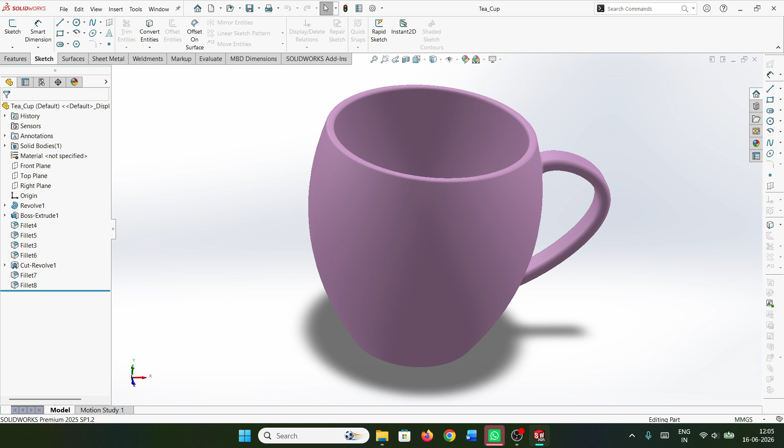So in today's video we are going to design this 3D teacup that you can see on my screen right now.

So let's get started. Click on File, New, click on Part and then OK.

Now that a new window has opened, click on Front Plane, Sketch, and select a center line. For the orientation, vertical and then infinite length. Place it at the origin.

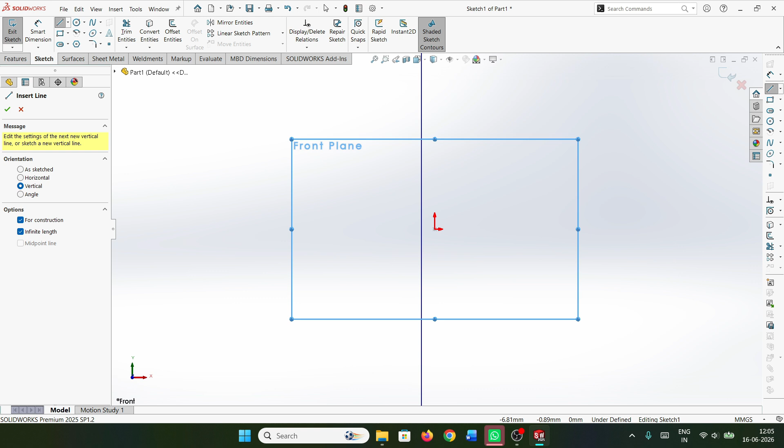Now select line, draw a horizontal line, then a vertical line and again a horizontal line. Go to smart dimension. The length of the vertical line is 60 mm. Bottom horizontal line, enter 20 mm, and the length of the top horizontal line is 30 mm.

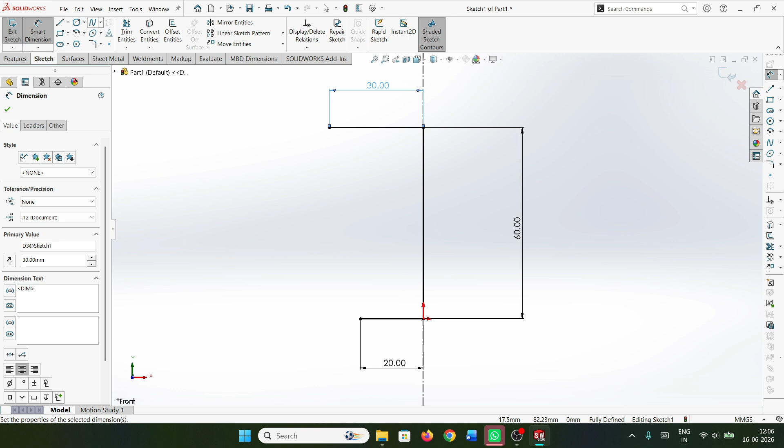Now select spline and make a 3-point spline here, point 1, point 2 and then point 3. Now go to smart dimension. As we have to define this spline also, select this point and the top line. So the distance between this point and the top horizontal line is 15 mm.

Vertical line and the point is 35 mm. Okay, this looks great.

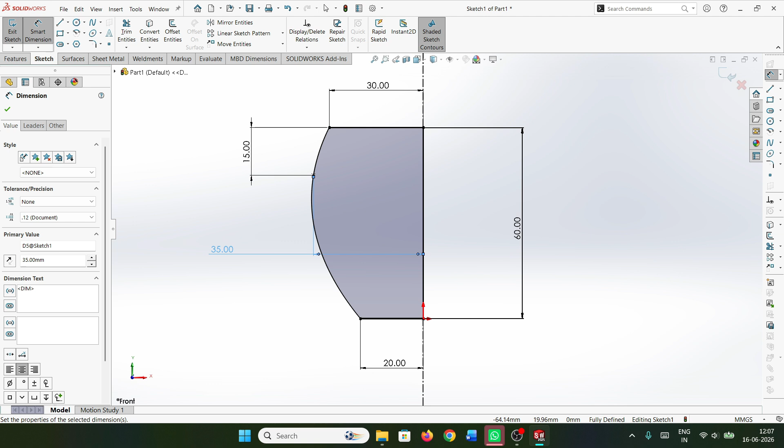Now exit sketch, go to features and select Revolved Boss/Base. So as you can see on the screen, our main body of the teacup is ready here.

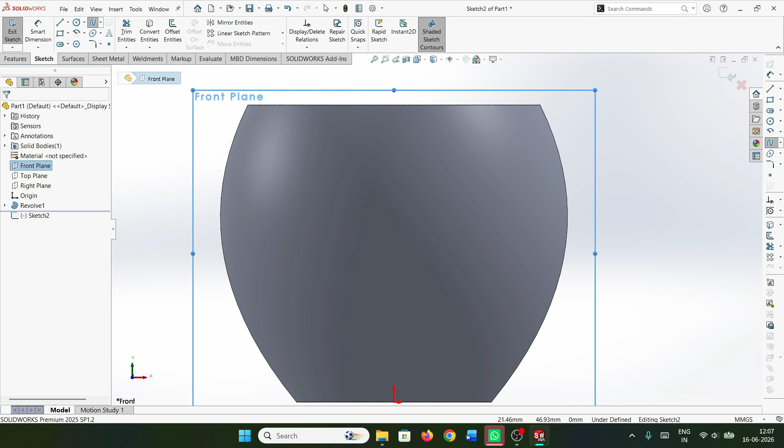Now select the plane, front plane, sketch and spline. Now we have to make the handle for the teacup. So point 1, point 2, point 3, point 4, point 5 and point 6.

Now go to smart dimension. Point 1 and the top edge, 15 mm. Point 2 and the top edge, 8 mm. Point 3 and the top edge, 20 mm.

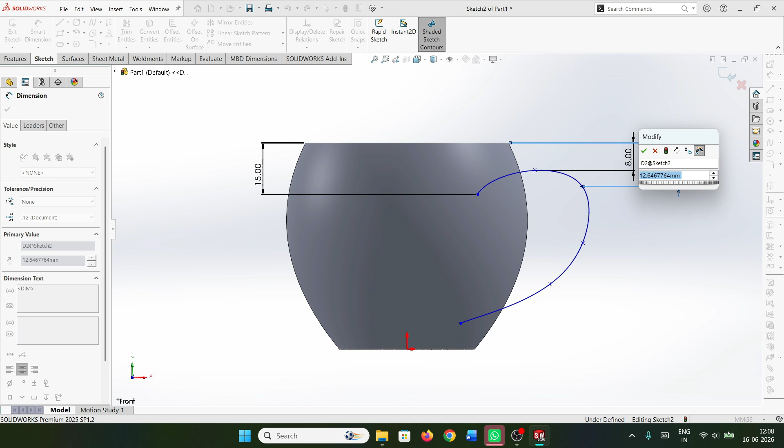Point 4 and the top edge, 30 mm. Point 5 and the top edge, 42 mm. Point 6 and the bottom surface is 10 mm.

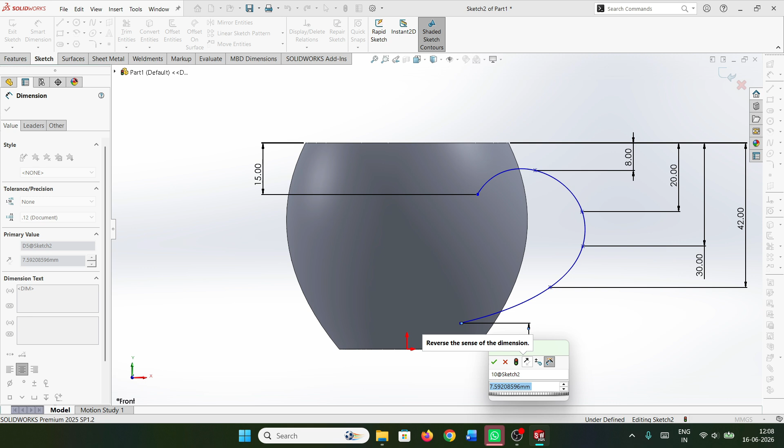So our vertical dimensions are done here. Now we have to give the horizontal dimensions. Point 1, 25 mm. Point 2, 38 mm.

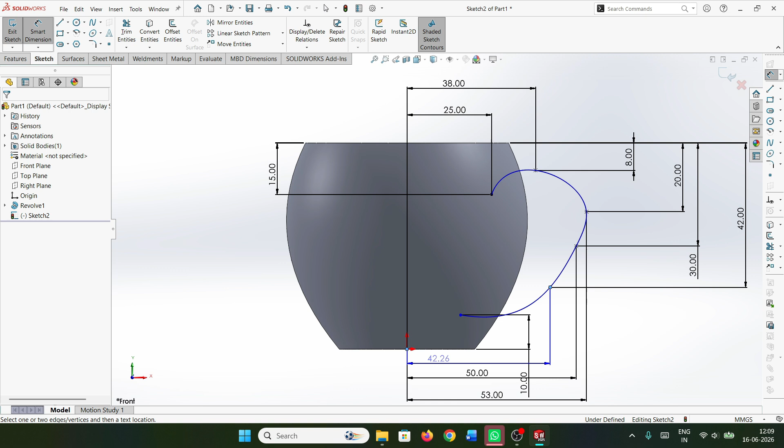Point 3, 53 mm. Point 4, 50 mm. Point 5, 40 mm. And point 6, 17 mm.

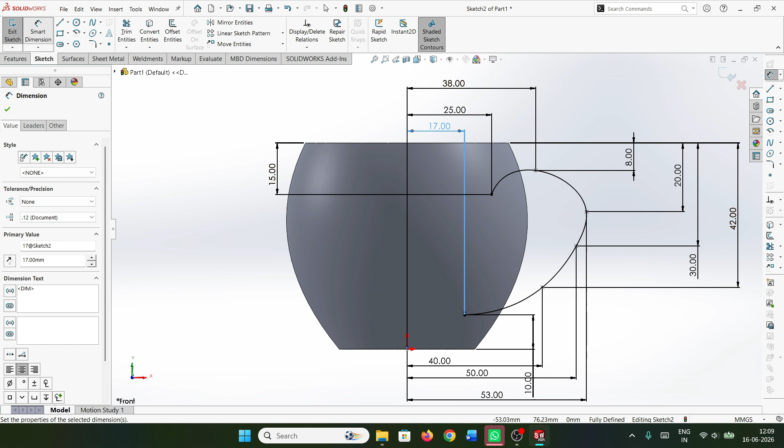Okay, so now we're gonna select offset entities and select this spline we just created, and the offset value is 3.5 mm.

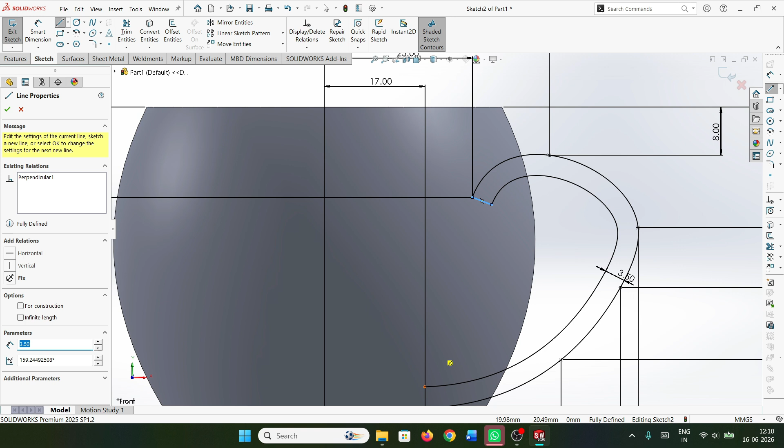Now select line as we need a closed sketch. So select these, connect these open points here and here also.

Okay, now exit sketch, go to features, extruded boss base, select mid plane here and 7 mm.

So now as you can see on screen, the main body as well as the handle is ready here. Now the next part is we have to create the main cavity of the teacup, and also there is a small cavity at the bottom.

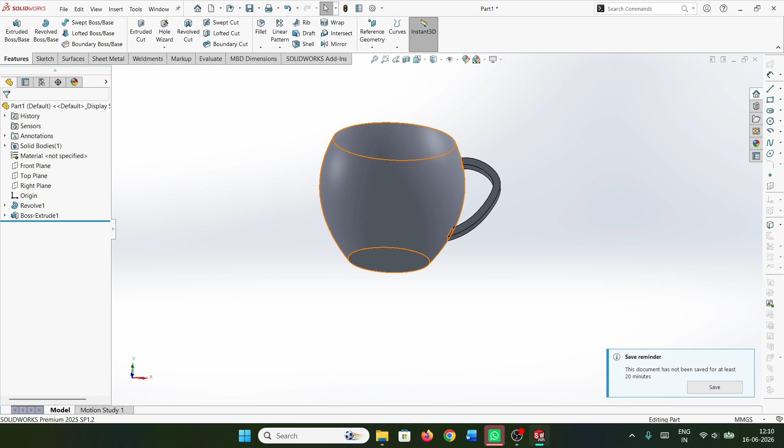So select front plane, go to sketch, select center line, orientation vertical, and then infinite length, place it at the origin.

Now what we are gonna do is select corner rectangle and make a rectangle here at the bottom. Okay, now go to offset entities.

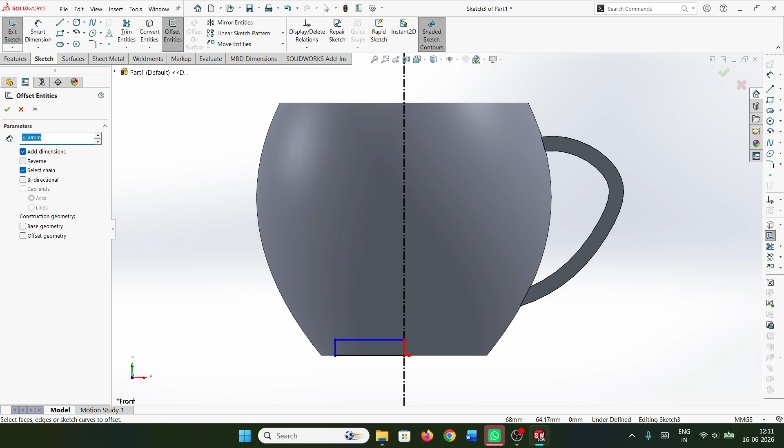Uncheck this select chain and select this edge only. Reverse the direction and 3 mm. Click OK. Go to spline.

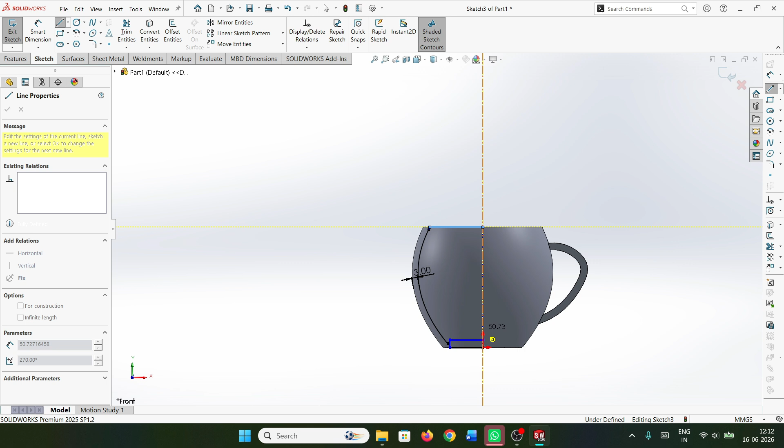We have to connect this curve to this top surface. So spline, and then go to line, horizontal line, then vertical, and then again horizontal.

Now click on smart dimension, enter 26.5 here. Select this line and this bottom surface and enter here 6.

Enter here 2.5 and this is 17.

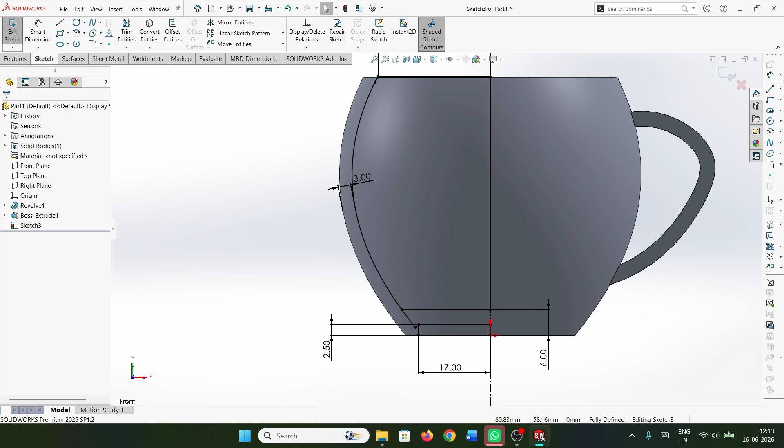Now click on trim entities and just trim this part. Now exit the sketch, go to features and click on revolve cut.

So our cup is almost ready here. The only thing that is remaining is to add fillets.

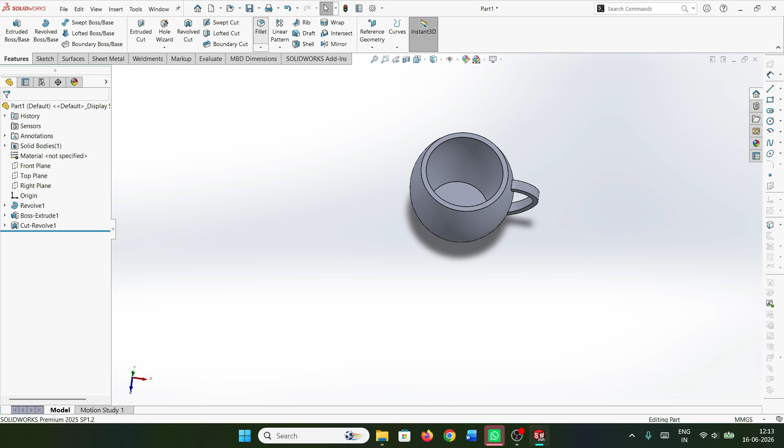So click on fillet, 1 mm radius, and select this top face, this bottom face, and select this face and this face.

Click on OK, then again click on fillet, this time for radius value enter 3.

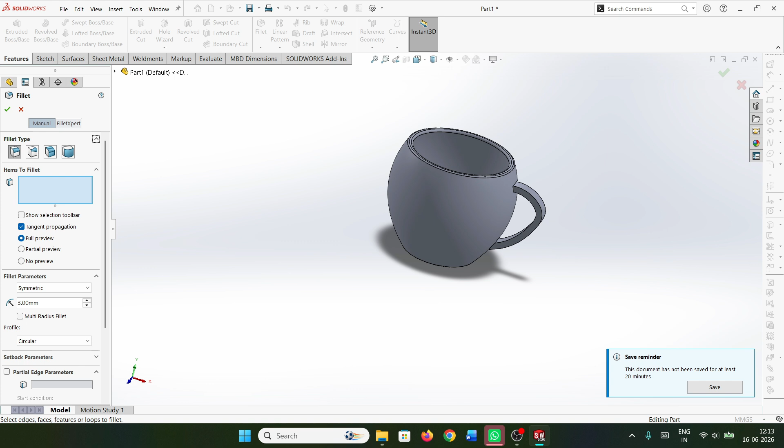Select this edge, this edge, this edge, and this edge.

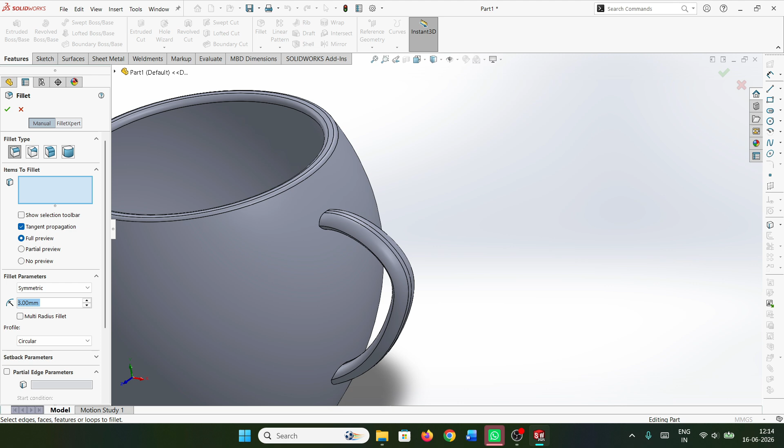Then select fillet again and this time enter 1 for the fillet radius. Select this, this, and here also this part and this part. Done. Click on OK.

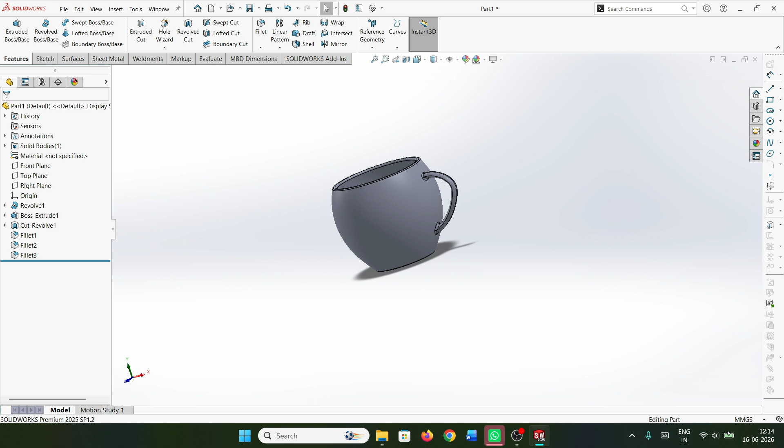So as you can see, our cup is ready here. Now the only thing that is remaining is to give it an appearance.

Click on edit appearance. You're gonna give it a color. You can choose any color from here, or there's a whole library here, you can select any color from there. So I'm gonna select this color.

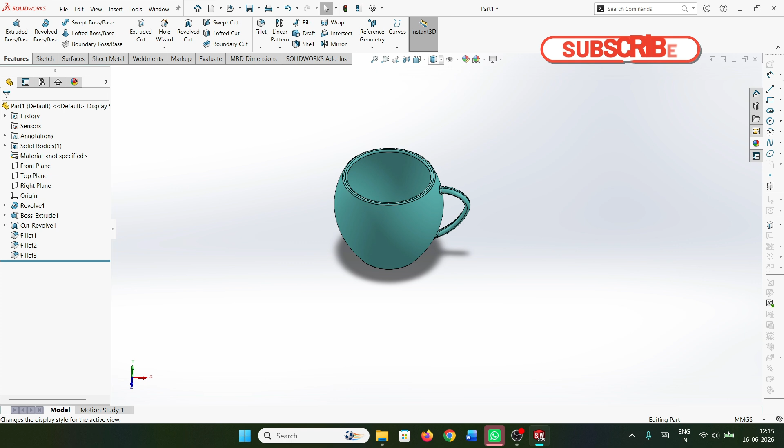Now go to display style and change it to shaded. So you can see on the screen our cup is ready here.